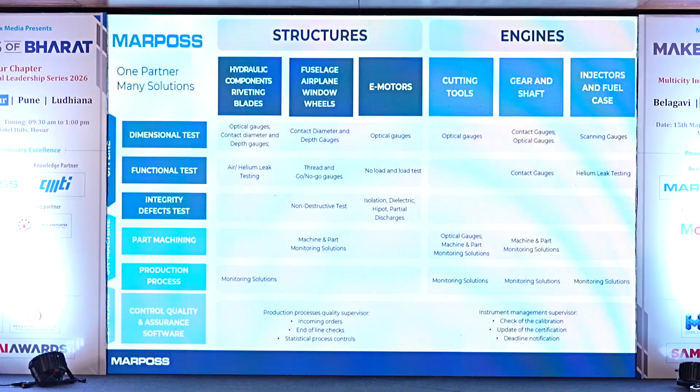Just to give another overview of what Marposs can do - especially for the automotive industry, which is well known, but apart from that, also on the aerospace line, we support monitoring, inspection or measurement for structures as well as engine side. You could see there are a lot of solutions, like gauging solutions, optical, non-contact, NDT solutions, and machine monitoring solutions.

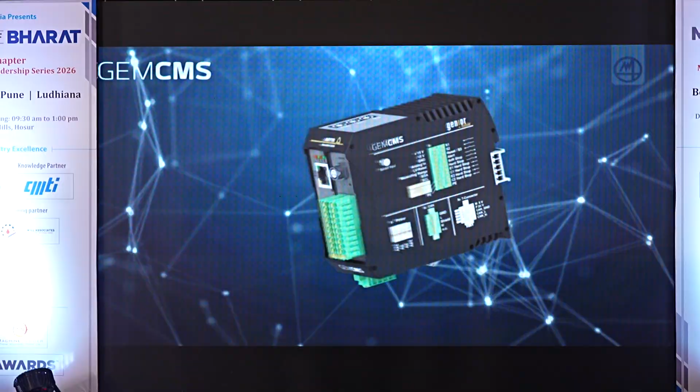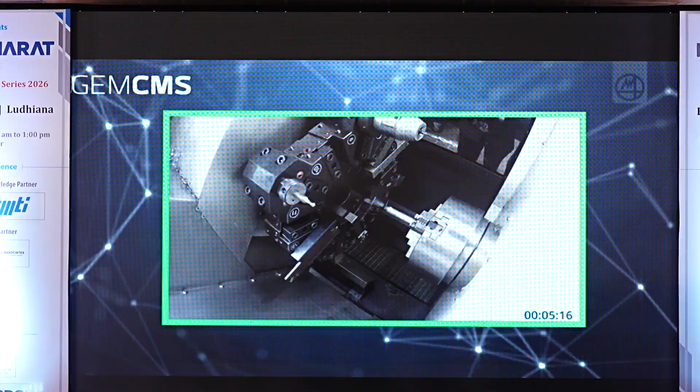Have you ever faced collisions and their consequential downtime effects? Some manufacturers have. Errors can be reduced but never eliminated. This is why we introduced GEM CMS, a solution to prevent the worst consequences, in order to save the production schedule and even much more. With a 1 millisecond reaction time, the risk of excessive damage is minimized, and the machine's life is even extended. Our monitoring is your protection.

So this was a small video about the collision monitoring system. This will prevent any major mishap, because it reacts in less than a millisecond, so the impact or damages would be minimum. That way you save on the spindle cost as well, and also you could bring back to production in a very quick time.

So these are some of the causes that have been listed for why there could be a collision. It could be wrong offset, wrong programming, or we could have loaded a different part altogether. There could be multiple reasons for this.

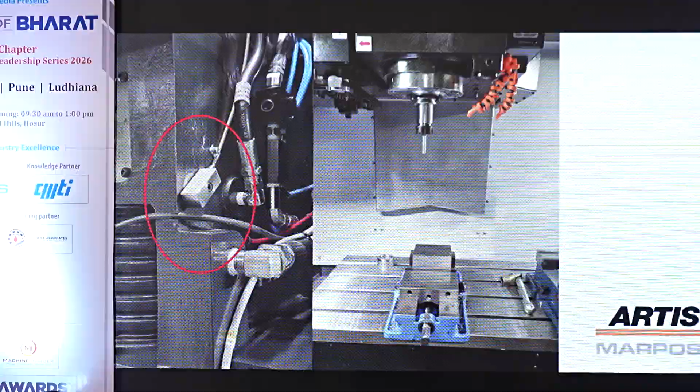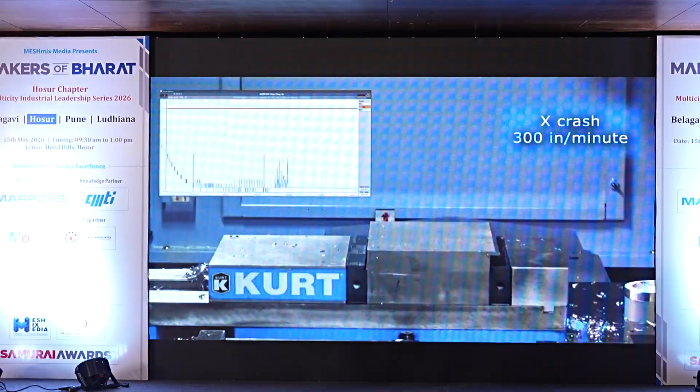So this is the collision monitoring sensor. This is a strain-based sensor. You could see on the graph the red line indicates the threshold upper limit. As soon as there is an impact, this happens rapidly, so immediately the emergency is triggered and the machine is halted. So that way, even in this case, the tool also didn't break.

So this was a rapid collision on the X-axis. You could see in less than a millisecond, the system was able to detect this strain and immediately halt the machine.

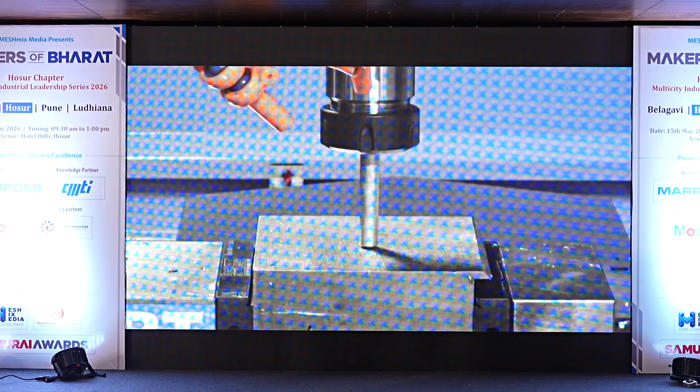So what you see is, when there is any collision, the tool gets damaged, which costs somewhere around 5,000, and then repair of the spindle, considering even an Indian make of machine, is nothing less than 1.5-2 lakhs. Then there's loss of production, because you don't get that spindle replaced easily by any OEM, and forget about the imported ones, it could take months. So considering those production losses, we are offering this at a very attractive price to customers. We could say just one collision would give you the ROI.

So this has been very successful, especially in the automotive and aerospace segments. The CMS unit has become a household name, and it has saved a lot of production losses and repair costs on spindles.

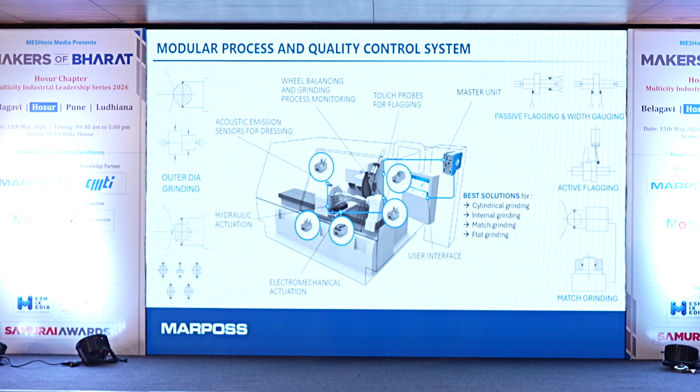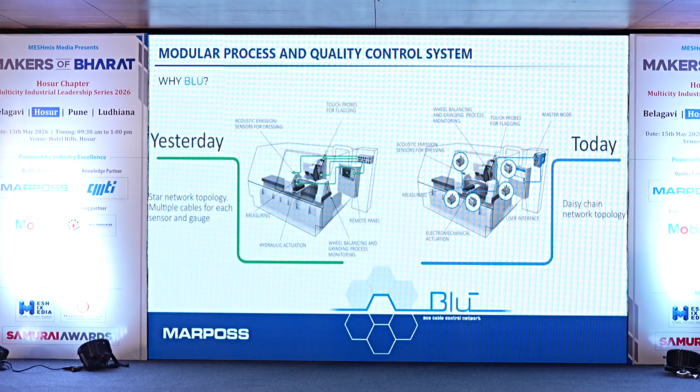We can share this later. So that was on the collision monitoring, and then the closed loop. We have a solution called Blu, which we spoke about last. Here it is a connected system wherein there is feedback and entirely auto correction is being taken care of. This is the schematic view of how the closed loop solution works.

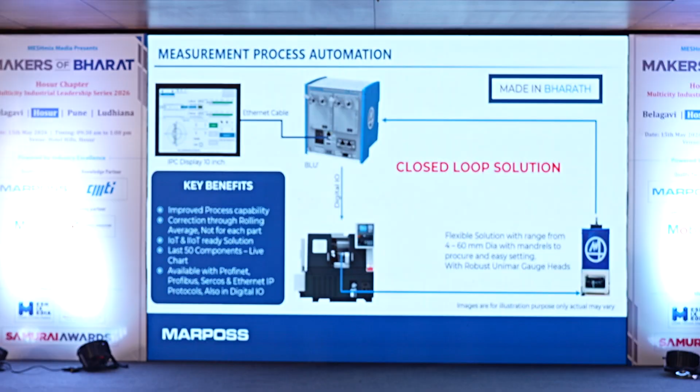Now I'd like to talk about the probing part, wherein product inspection and measurement can be made inside the machine, so you don't lose out on that time, and also you measure accurately. The traditional way was maybe with a dial, or a shim, or a paper, which is what we used to do earlier.

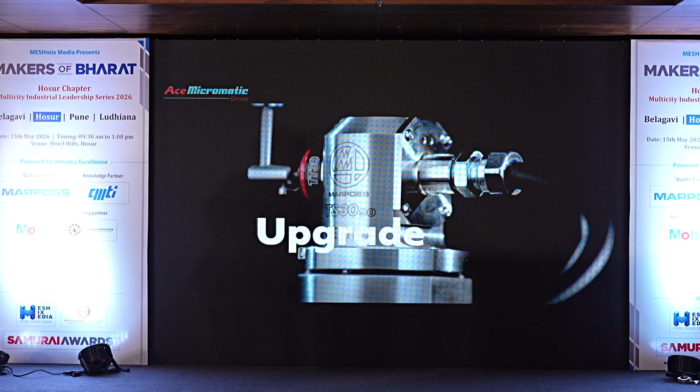Now that can be totally replaced by an automated solution by Marposs. This is the tool setter, wherein you can measure the tool length plus diameter inside the machine itself, where there is no scope for any errors, because it is taken care of automatically.

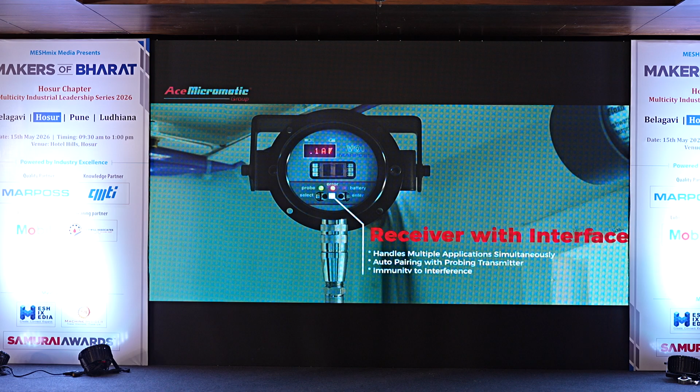Optical probing solution or the radio probing solution on the machines, and we have a very user-friendly macros as well. There is an app also available on both iOS and Android, wherein you just give the component dimension and you get the macro. And then this is the tool breakage detector, wherein you can detect the tool breakage on the machine.

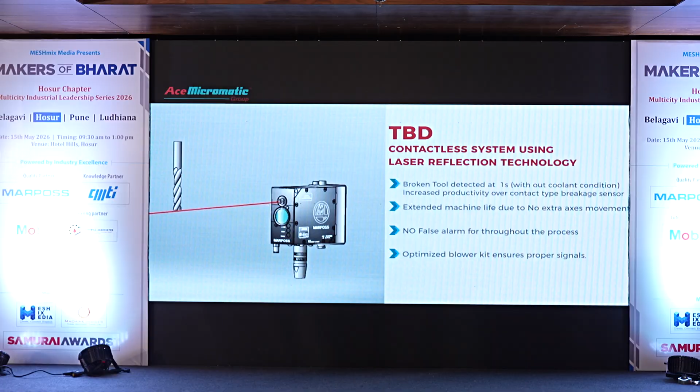So probably when there is a drill and a tap, then you have a broken drill, then you lose out on the tap itself, and then probably it ends up in final inspection that you have produced the part without a drill or a tap. So those can be avoided.

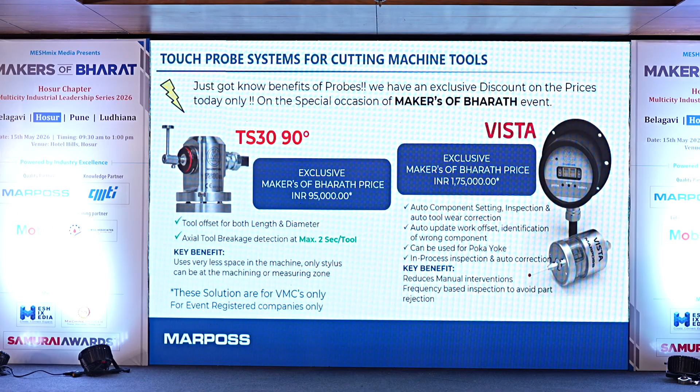On the commercial side, on the product side, if you look at the tool setters, where you make the tool length, dia, and the breakage detection also, we are offering it at an exclusive 95,000 as a special price for the benefit of the event. And also about the probing, we are extending a special pricing at 1.75 lakhs. So probably we can make a benefit out of this event having participated. So those were on the probing part.

Then on the tool holder runout system, specifically the aerospace component manufacturers probably would have faced this issue, where generally the aluminum part machining is done, where the chips fly and get accumulated on the tool holder. So those chips are difficult to detect, and only once you have a component produced do you realize that it is an oversized part or not as per the dimension.

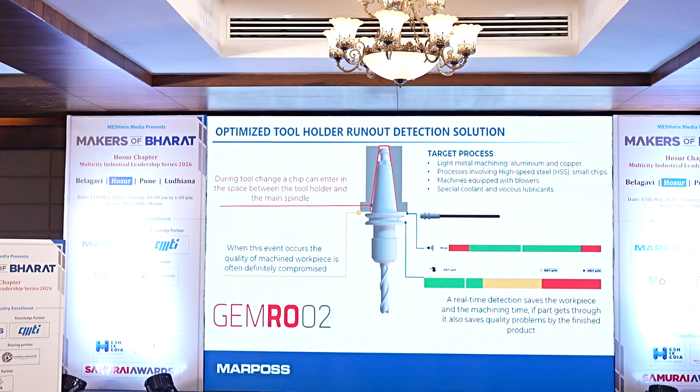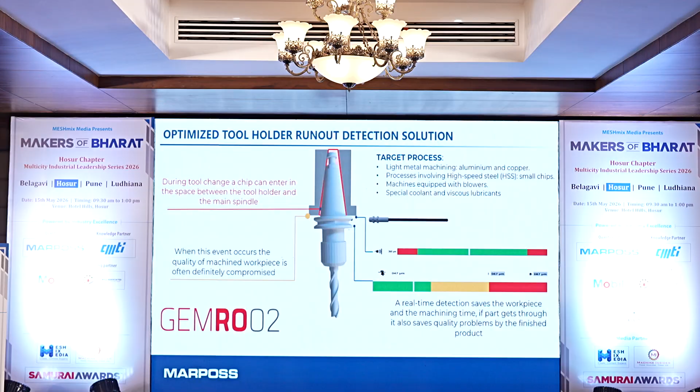Through our eddy current based runout sensor, we can detect the major dia and minor dia, which gives us the displacement basically. So by that we are able to understand what is the runout on the tool holder, and those limits can be set - maybe a safer limit, then alarm, then hard stop. So this is another innovative solution by Marposs.

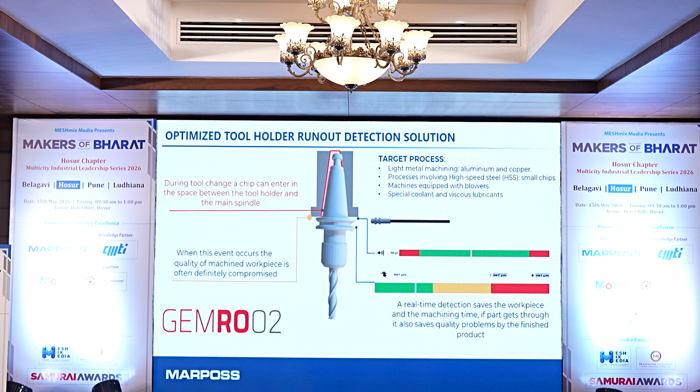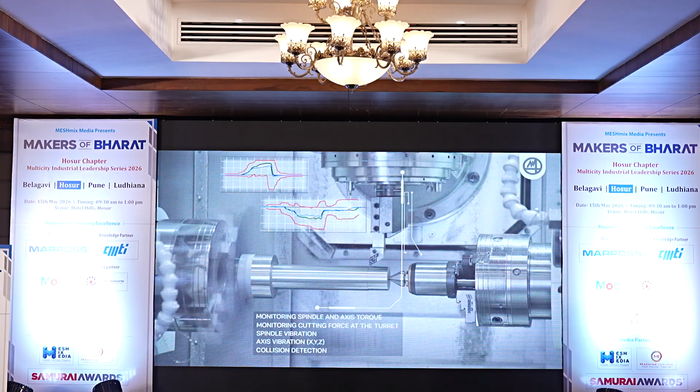And then on the monitoring part, we have Genior Modular Solutions, wherein we can do a lot of monitoring activities on the machine. Like our speakers also mentioned in earlier topics, predictive maintenance is a must these days. Likewise, we have a monitoring solution wherein you can monitor the tool, like before even how it is wearing out. Once the tool is broken or there is an overload, all these aspects could be measured.

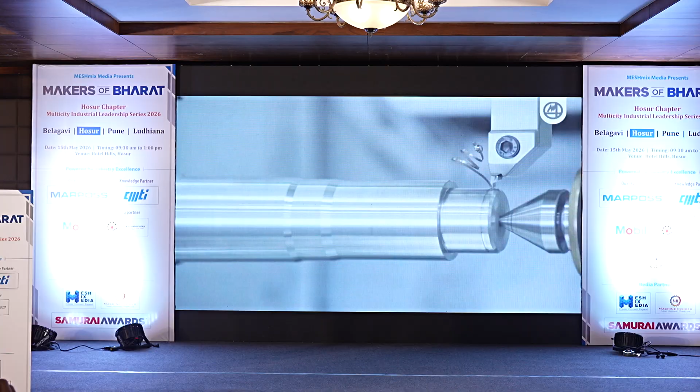There are multiple ways we do this, either through digital torque adapters or through CT coils measuring the current data and plotting the power curve. So by this we are able to monitor the machine on the go without having to waste any single second of cycle time. This is another innovative solution which could be incorporated on any make of machine.

So this was on the monitoring, like you can optimize your process. And the traceability is what speakers also said, especially our aerospace segment speakers Mr. Hardik and Mr. Hiremath shared about having traceability of the process, which could be addressed with our smart monitoring solutions.

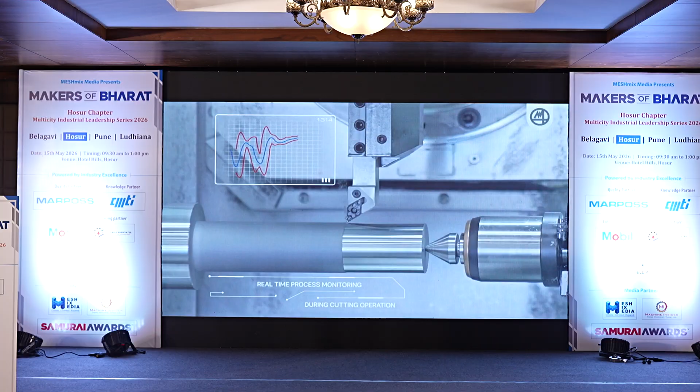So these are the benefits, to list a few, like an increase in tool life, reduction in machine stoppages, and you know when to change the tool because you are generating an alarm as soon as it is worn out. So straight away you can see at least 20% increase in tool life.

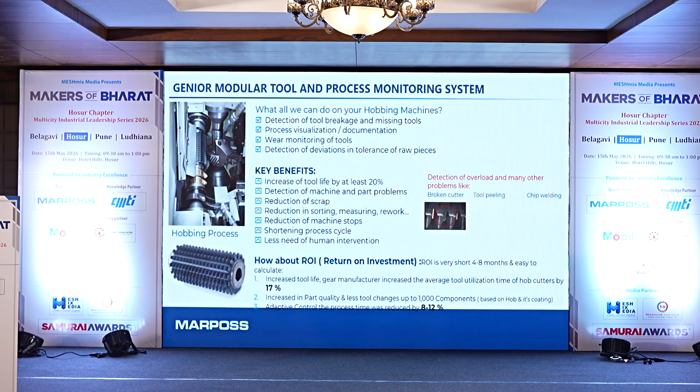So yeah, this was about our probing solutions and the monitoring solution. In a nutshell, having incorporated this, you'll be able to straight away jump 20 to 25% productivity improvement on the shop floor, which could be seen from day one itself.

So now I would like to call my colleague Nikhil to talk about our post-process solutions as well. Thank you.

Through the end process systems, I'll be explaining our post-process solution. So we have our Testar products, which are gauging pencil probes used for our custom gauging solution, the end-to-end solutions. This will be based on customer requirement, based on cycle time, as well as part limitations, etc.